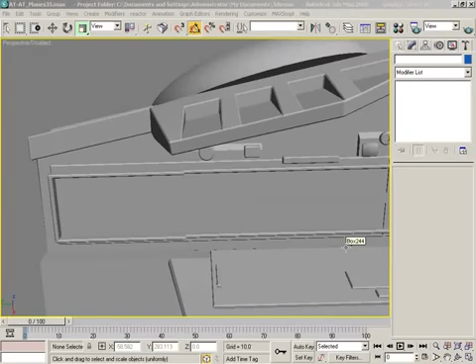In the previous video we were working on this cannon area down here, and there's some things going on that I kind of want to clean up a little bit. We got editable polys everywhere. Let's take all these guys and slide them in like so, because we kind of scaled everything down but never fixed that, so we need to fix that. We got some color issues we need to clean up too, but I'll deal with that later. I'm not too stressed about this.

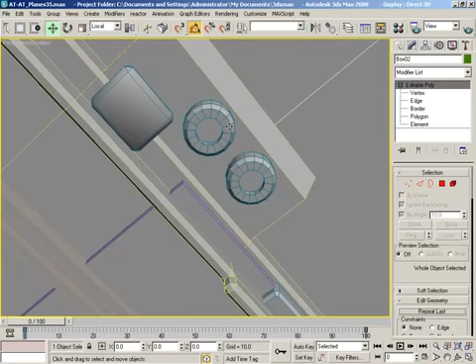Here, this is an interesting little problem. Let's press F4. And I want these guys, aha, those are my friends. Let's get everybody. So let's go to Elements. Oh, cool, I pretty much got them all. That's pretty much right.

Now let's do smoothing groups on these, just because I see some crazy amounts of faceting that I don't really want to see. Oh, you know, that'll do. It's a little more, well, okay, maybe not. Let's try 20 degrees and see what that comes out like. That's probably a lot better. 30 degrees? There, that's what I was actually shooting for, some rounding on that beveled edge. Okay good, so that takes care of that.

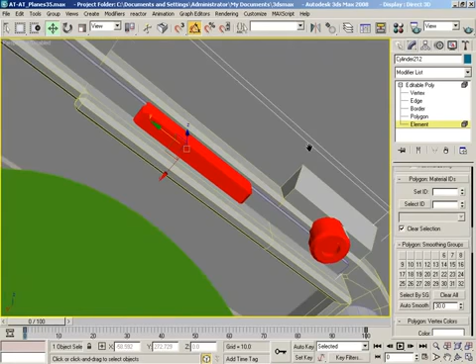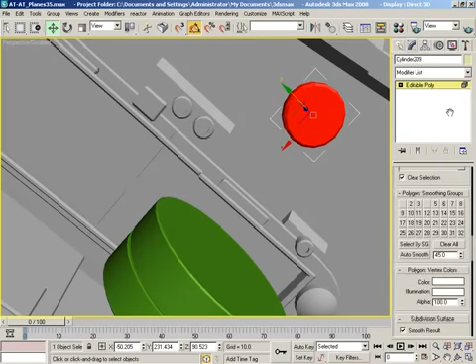F4 to get out of there, and I think that's going to work out just fine. Now let's see, this creature here needs the same treatment, so I'm just cleaning up some things so I don't have to come back and try to remember them again, because there's just so much going on here. I will probably forget.

Alright, good. Now I want to start working on these cannons in earnest, but I don't want to sit here and build them out piece-by-piece with little tiny finalized parts. In fact, I may end up getting into this green thing that I built earlier, I'm not sure yet. But what I think I want to do here is just drop in some simple shapes that will represent the bulk of the cannon itself, and then we will model, make cuts, make edits, make changes.

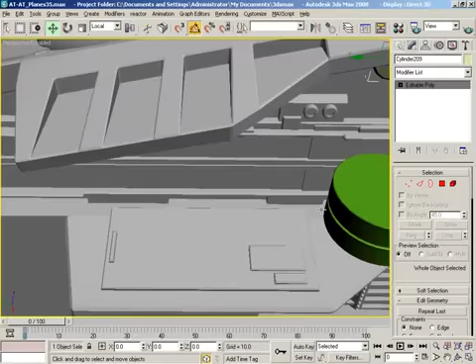Do whatever we need to do to turn those into the finalized hardware, so to speak. So let's just get some basic placeholders for now, just to represent the cannons and what they look like. Let's see here, I'm going to jump over to the back view. And I'm going to assume this view just won't be all that helpful in terms of the image plane, which is probably a pretty safe bet.

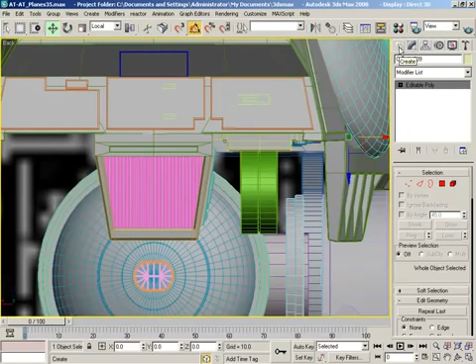But let's create a cylinder, and I'll tack it as close to the middle of that as I can. Give it some height. Go back to perspective. And move this up here where we can work with it. Now that's probably a little bit big for what we're trying to build. Maybe not, it's hard to say because we still need to add to the thickness of these guys. But still, it looks like it's a tiny little bit over the top.

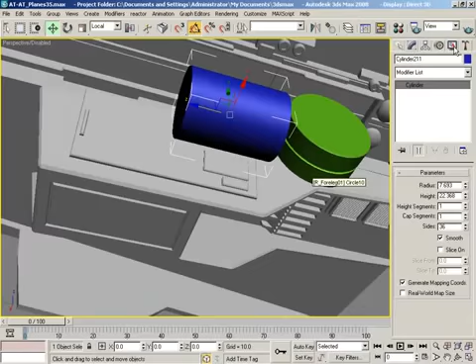So I'm going to pull down the radius of this a little bit. That's probably a lot closer to what we're actually aiming for. And we can slide it forward a little bit. We've got, well, we'll have some work to do on it, obviously. But a couple of things: one, both of these objects really kind of need to go forward. I'm building this really far back on the track.

Let's move these in view space. So maybe to right about here. Maybe even further. Now I'm just going to get this blue cylinder alone. Let's increase its height.

And then it's going to need to taper and go out past the end, but I won't worry about that right now. Let's just shift drag out a copy of it. I'll give this some other color just to differentiate. Let's bring down the radius a bit. Increase the height a little bit. And that's just, of course, going to be the end of the gun stick itself.

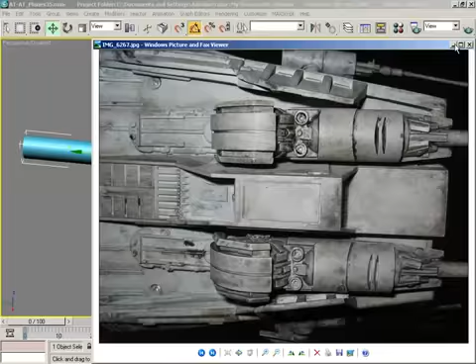Now, something I want to know: if we take our side view here and I switch that over to Direct 3D, which will take a moment to process, can we really see anything in the background image plane? Yeah, we can see a little bit.

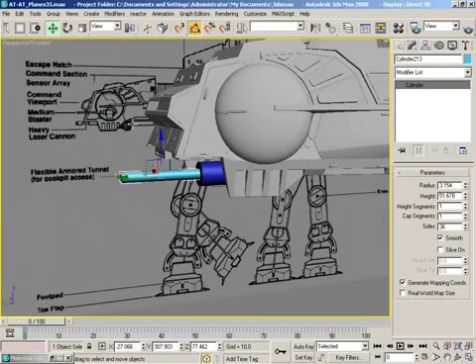Now, in this image, it looks like these guns have really been slid back because they do retract underneath, so I'm not really going to use that as much of an indicator. We'll just go ahead and leave it like this for starters. And because I'd like to be able to use my undos in the future, I'll go ahead and turn that back off.

Okay, so we've got a couple of basic shapes down that we can go ahead and start working on. Now, some of this stuff, we can get an idea of what it looks like. Other parts are kind of vague, really. And what we'll probably end up having to do, not only vague, but they change depending on which one you're looking at. We've noticed that a lot throughout this modeling project.

It really depends on who put together the model, which one you want to decide is right. And then on top of all that, it's really a lot about how much modeling you want to do on it, because a lot of these, as you jump from one model to the other, it's just all about how much tiny little bits of greebling you want to put on there. With things like cannons, it doesn't take a lot of imagination to say, well, maybe the design of the cannon has changed, or whatever. But it's also one of those little tiny details that probably nobody's going to notice. So just do what you want with it.

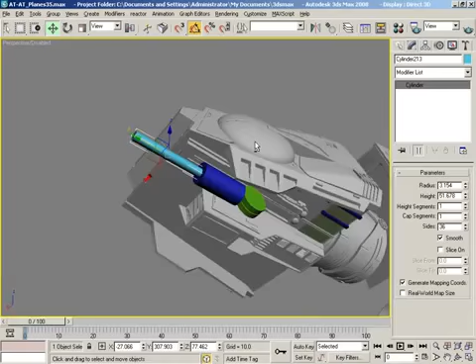Now, we already started to build this piece. And the problem I have with what's going on here is that, in the end, this will not be a completed cylinder. And that does make things a little bit complicated, maybe not too terribly complicated, but here, let's see.

If I come over to my picture, and we can still kind of see what's going on here. What I've built is this piece, and as we can see, this is only a partial shell that kind of wraps around. So I'm going to try something real quick.

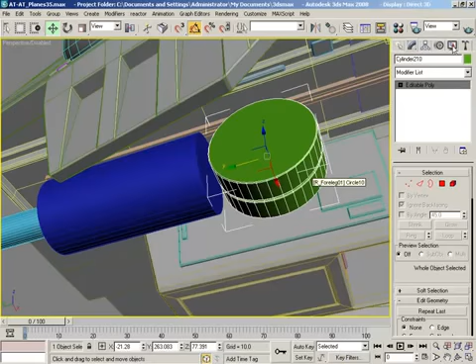Let's minimize this. Let's grab this face. Actually, we have both sides. That's actually exactly what I want. So good. Let's do an inset. By maybe even that much will do just fine. So we'll click OK. And then, I'm thinking, yeah, let's just go ahead and nuke that. So I've got a little bit of thickness.

Now, I'd like to know about how far around this goes, because that's not perfectly vertical. It's kind of getting there. It may be closer to it than I think, but let's see, we got a little bit of wrap around there.

And that's not so helpful. I mean, we could probably just kind of fudge it. We got a little bit of an angle there. So let's say we wanted to go to about here. Maybe only down to there, you think?

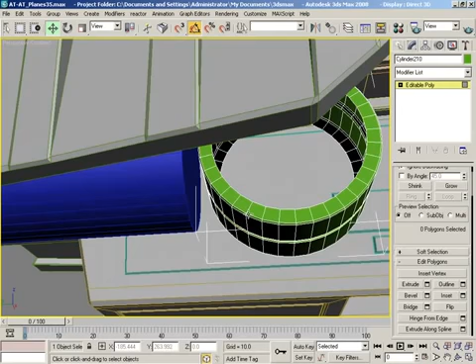Now let's try it. So let's see. Let's grab edges. Yeah, let's see here. Let me try this. Let's grab this edge, and we'll ring that.

Now, do we have any other really nice side pictures of that cannon? I think we don't have much that's really all that detailed. And nothing that goes up very high. So we'll probably end up just having to kind of make it up as we go, which is, of course, just fine. I just want to know before I really start slamming stuff together.

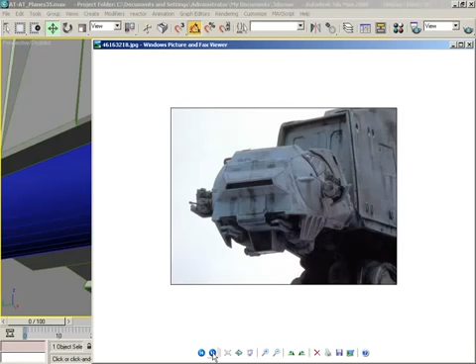Yep, we're switching over into make it up mode. Yeah, it kind of tucks up into some stuff there. So we could actually pull the track piece down a little bit, maybe with some greebling and whatnot. Take these edges and bring them down to kind of surround everything a little bit later.

But we're going to start off there with a ring. Let's go to about maybe here and do another ring. Convert those to faces and delete. And then we can grab elements and make sure I have elements, and let's grab this element and just nuke that. So now that's all kind of by itself.

Now I want to try something. Don't know if it's going to do what I want it to, but sometimes you just have to guess. Let me try the old shell modifier. I actually remember when this came out in Max. Long time ago. Alright, so let's see. Outer amount, inner amount.

And we'll just give that some thickness with shell. I think that's going to work out just fine for us. So let's right click, convert that to an editable poly. And there we are, awesome.

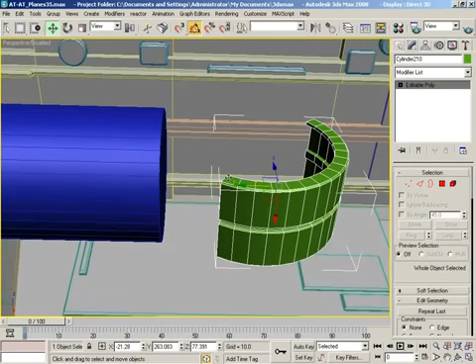Now we've still got that funny little squared off hex bolt-ish area around the outside. I'm not going to stress that at the moment. Let me show you what I'd like to build next.

Because we really do have a cylindrical shape that needs to fit inside, kind of like a disc or a few discs. So we've got this that sits kind of inside here. So I want to build this area, and here's how I'm going to do it.

And there, now his pivot is right there in a nice location. Very nice location, actually. Let's pull all this stuff back toward transparency, and let's jump over to the left view.

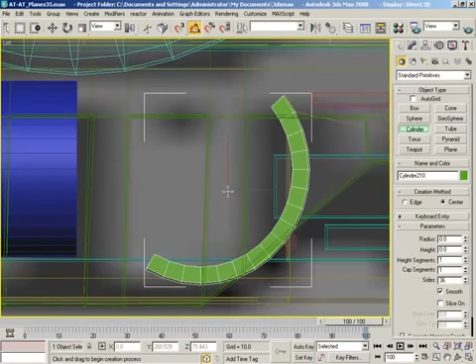And I don't really want to do that, I just want to move. So we'll zoom in here. Now let's grab our create cylinder, and I'm just going to click right about the dead center of that shape, well, where the pivot was anyway. We'll have to kind of modify the position, obviously.

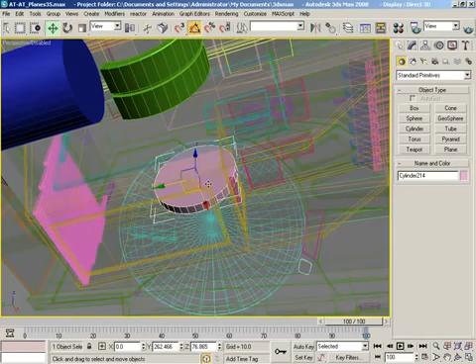I'm just going to kind of fit that inside. Perfection isn't necessarily critical in this case. Now, boom, hit P, let's slide this over. Ooh, that really didn't do what I wanted it to at all. And slide this over. Okay, looking good, now let's see.

I'm getting maybe 3 separate levels of pure detail that I need to be worried about here. So we could just start there. Yeah, let me just try that. If you don't understand what I mean when I say that, you'll know here in just a moment.

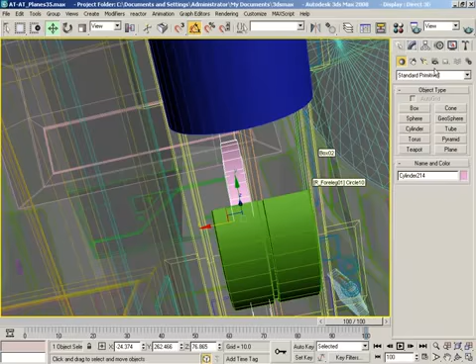Let me pull this over to about here, just something to give me the overall thickness of the part, which is going to fit just about inside here, but maybe not really. Let's just say it does fit. So we'll go from here, and then I'll increase my height all the way to the other side.

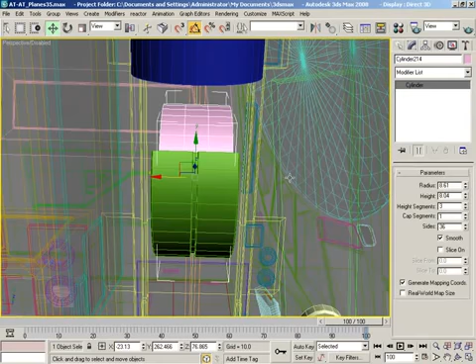And let's frame up on that, and I'm just going to kind of eyeball center that. Looks pretty good. Now I'm going to give this height segments of 3 to start us out. Let's go ahead and convert that over to an editable poly.

Now let's grab edges, I want this edge and this edge. We want to loop those and then chamfer them with nowhere near that much chamfer, so just a little bit like so. Let's grab an edge here and an edge here, and we will ring those.

Boom, and let's do an extrusion. I'm not going to worry about a bevel, this is just so tiny, we're just going for some differentiation. Click OK, so now that's broken up into 3 separate areas.

Now let's grab edges again. I want this guy, we want to ring that, convert that over to faces, and then I want to scale all those apart just in Y and Z.

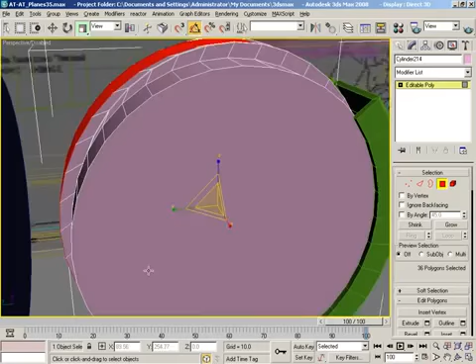So like so, make the whole thing a little, well, I'd like it to be a little thicker. It looks like it's kind of going a little, ooh, you know what? It took me a second to figure out what just happened there. When I did my extrusion, we were going by group, and I just always assume things are going to go by local normal, which I shouldn't ever assume that.

So there we are. Now let's get edges, get you, and then ring, and we could probably just scale these. We don't really need faces that bad. So pull that out. Now we can convert that over if we really wanted to, and we could do a bevel by local normal. So just a little bit out in height and a little bit in right there.

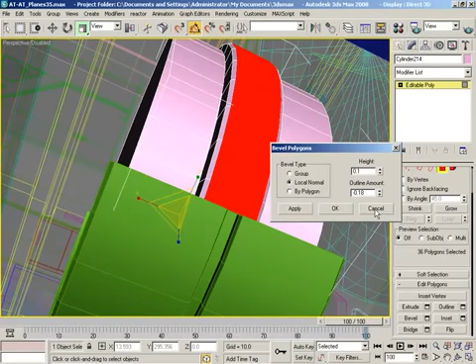Actually, let's not do that yet. I'm going to take that back, so cancel that out. And also scale this back down just a little. I like the different elevation, but that was just a little too severe. So there we go.

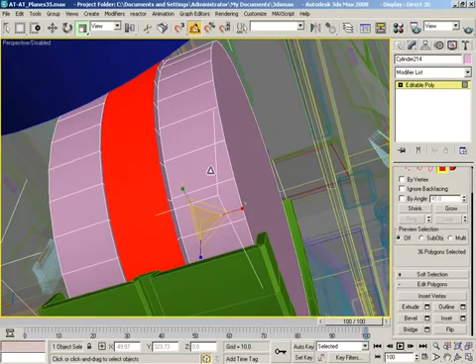Okay, now we've got some plating and some interesting things taking place on either side here. So what I'm going to do is just kind of break this up into some segments that are doing some things. So let's see here, let's grab faces, come here, come back here, you. Wow.

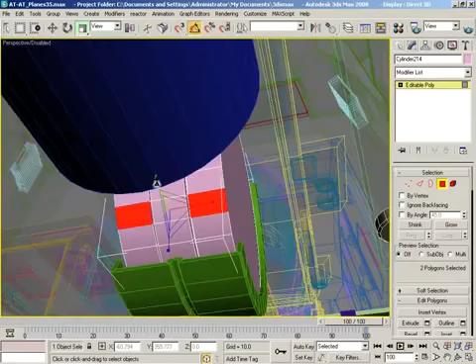Raycasting selection in Max is just the coolest thing, isn't it? All right, so boom, I really don't understand what their algorithm is. I mean, if somebody would like to send me a white paper explaining how when you click on a shape you get some random magical stuff that's hidden behind it, I would read the heck out of that white paper, let me tell you. All right, now, boom, we got all this stuff. So let's do this, let's grab you and you and all this stuff up to about here where it's no longer visible and no longer necessarily pertinent.

And let's extrude. We'll go out with that, click OK, and then we'll immediately do a bevel. That's a nice little bevel. We'll just do that much.

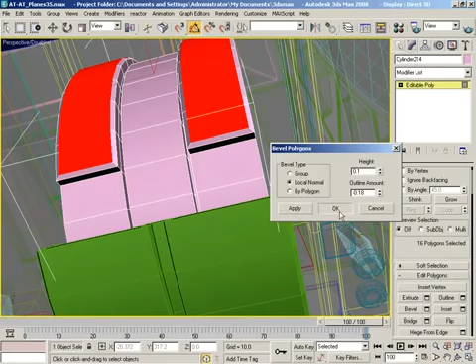Now I'm going to grab all these edges. It already knew which ones I wanted, which is fantastic. Let's do several connections here.

I'm not going to worry about the picture anymore, I'm just totally making this up as I go. Let's just try 2, and that'll be OK. Then let's chamfer that and click OK.

Let's grab edges here. Let's undo until it gives me that back. So I want this edge, and this edge, and this edge. And actually, you know what, not that guy—let's just get the two outer guys for a moment.

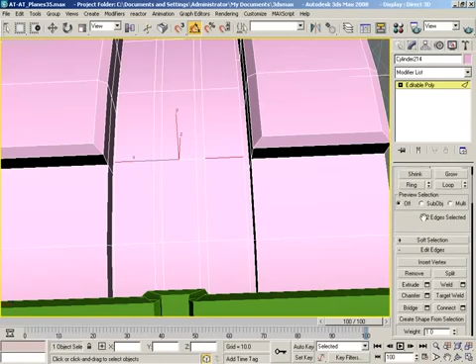And let's ring those, then we'll convert over to faces. We'll do an extrusion and make this an outward extrusion, so that goes out a little bit.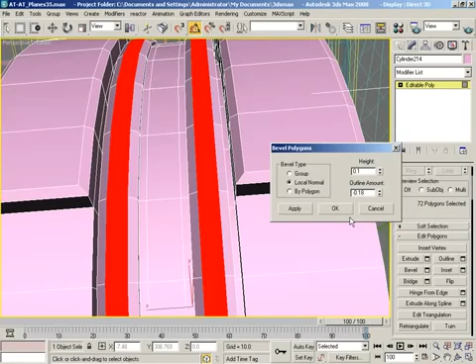Click OK, do a bevel. Now in here, let's go to Edges, get U, do a ring, connect that a few times, click OK. Let's chamfer that just a tiny little bit.

Click OK. Now back to faces, and we want U and U and U and U—not U, but these few in here.

And let's do a bevel, and we'll go a little bit higher. Actually, no, let's not go very high at all. Click OK.

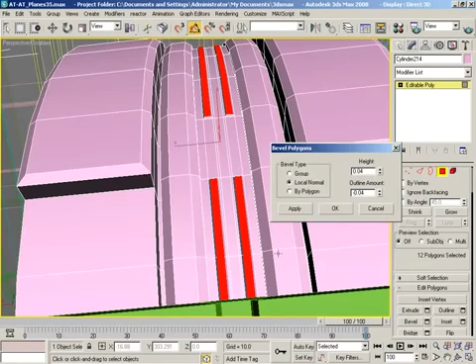And we'll get all these guys in here and we'll do an extrusion. Goes out pretty far, and then do a bevel on top of that, and click OK. So now that has a lot of different things going on with it.

And then we'll grab these guys. Let's do an inset—not that far, just a little bit. And we'll click OK.

Extrude inward, and click OK. So cool, so now that's just got a little bit more of an interesting feel for what's taking place there.

Now I'm going to grab either side over here, and we're going to inset these. Like so.

And you know, yeah, okay. I'm still there, I'm still hip and with it. I know what I'm doing.

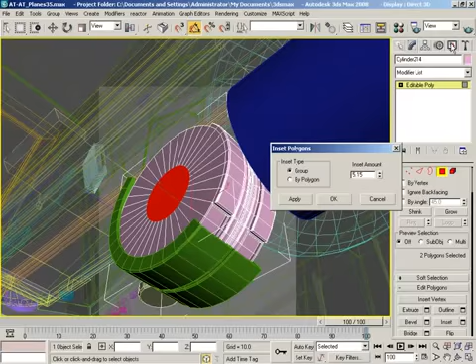Let's pull this in a little more. Click OK, I want to do an extrusion, so go out positively.

Click OK, and then let's do a bevel. We'll go positive and then positive, so it's actually going out a little bit. Click OK. Do an extrusion.

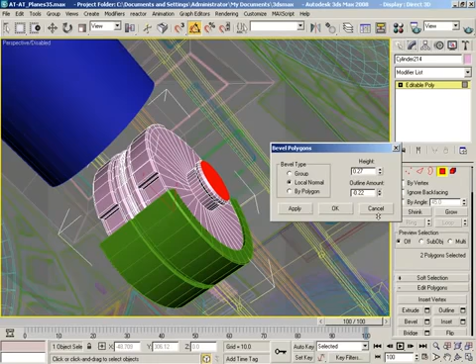Not quite so high. Click OK, and then another bevel, this time going inward, and that's OK too.

Let's see, now if I grab you, I should be able to ring, and let's just do it on both sides just for the fun of it, and ring, and connect.

Actually, let's just connect once, and then let's see if that... this should work. I say that sometimes and I end up biting my words, but this should work. I should be able to just scale these out with edge constraint on. That seems to be fantastic.

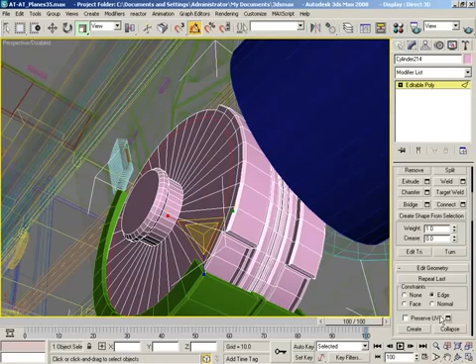So let's go ahead and click OK there and get out of edge constraint. Excellent, so we're going to do a chamfer on those by a little more than that.

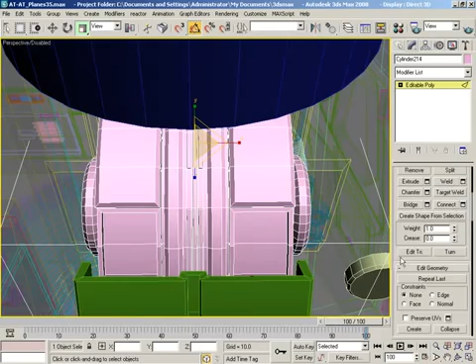All right, and an edge. And an edge—oop, not an edge. And a ring. Convert this over to faces.

Let's do a bevel, and we want this to go in negatively and by just a little bit, and that'll be fine. We don't really need to go any further than that. Okay, awesome, that's working so far.

Okay, now a few things that we need to do to clean this up, and I'm going to jump out of wireframe mode by hitting F4.

Let's get U and U, and let's drop our material on, and then shade everything up so we can see what it looks like.

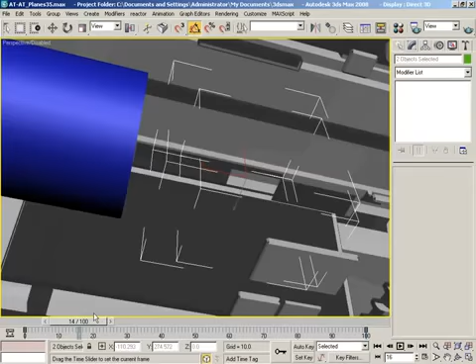Alright, cool. Also, I need to adjust smoothing groups on this piece, because that's just looking bad.

So we'll hit 5, and 45 might do it, but that's probably a little extreme, so let's try 30 degrees. Even that's a little bit too high, so let's try 20.

I think that'll work.

Now, let's see, a few things that I want to do here to make this just look a little bit nicer overall. And the big thing is I want to cheat and make this as easy on myself as I possibly can.

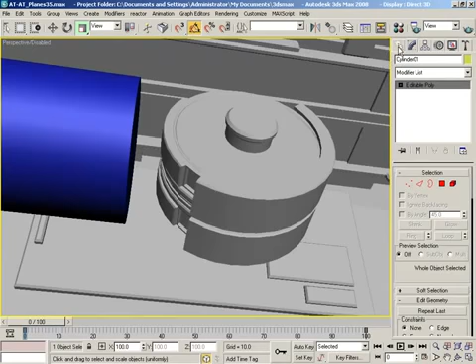Let's see here, let's do a box. Oh, I guess I need auto grid on. So let's make sure that that doesn't go anywhere—we want auto grid. Let's draw a little box right here.

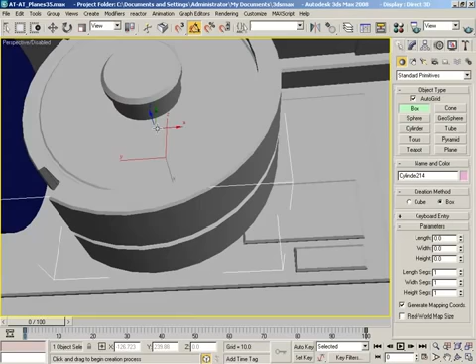All right, now a couple of things. Let's press F4, I want to be able to see the wires. And let's get out of here. We're going to take our length segments, and we'll pull those up.

That's probably enough to kind of get us started. Get my move tool out. And let's see, let me grab my align. And let's cancel that actually. We want you by yourself. Come on.

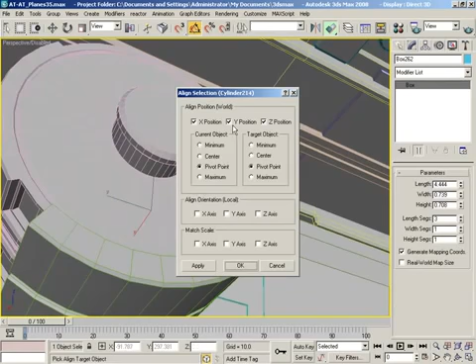There we are, and align to you. Pivot to pivot, but not in all 3 dimensions. Let's just do this in Y only. So that looks nice, click OK. Let's increase our length so that sticks right into the central hub.

And now, let's see here. We could probably get away with just 1 height segment, I'm thinking. Or length segment, so let's just do 1 here. Or 1 extra, so it'd be 1 plus 1. Now let's convert this over.

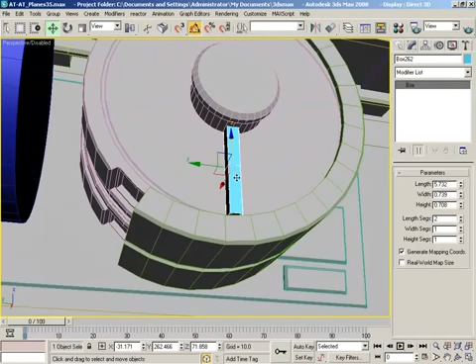Let me grab edges, I want this guy. We're going to loop and we'll pull that down. Hit 4 to grab faces. Did I hit 5 instead? Because really all I wanted was this guy. Now I'm going to hit Z to frame up on that.

Just pull this out to about here. Grab edges again, we'll tuck this guy down a little. Now, if I grab this guy and loop, well, we get kind of up to where I want to go. So let me just start here with a ring.

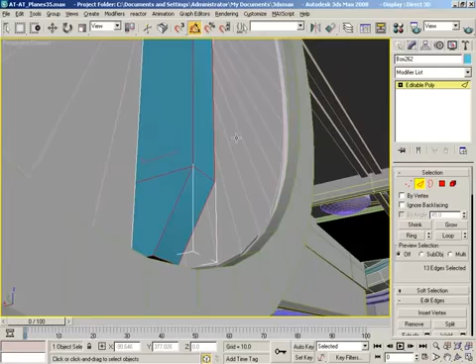I don't want this guy. So let's hit Q so I don't accidentally bump something. And I need this, and this, and this. We'll go ahead and grab that, and this, and this. We can go ahead and grab these two. You know, let's just loop that. That's probably good. Okay, now let's chamfer all this.

Now also, I'm thinking that this could be widened up from what I originally designed here, so let's thicken that up a little bit.

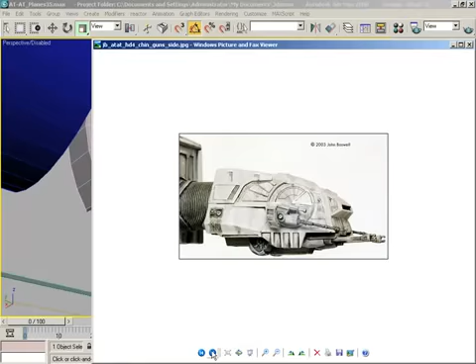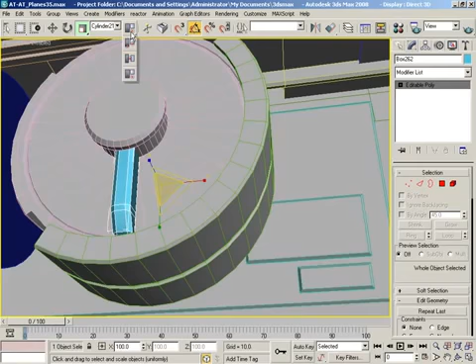So let's see here. Well, what we can probably do... yeah, that should probably work. Let's try this. Let's go ahead and get out of here, and then let's switch our mode to pick, and we'll go in cylinder 214 space, and then use transform coordinate center. Did that? It looks like that did what I wanted it to. It's just the control is so far away you couldn't really tell.

So cylinder, reference coordinate system. Now we should be rotating around, and it looks like we are, which is good. Now I'm going to shift drag this out to 45 degrees and make 1, 2, 3, 4, 5, 6, 7 copies. And now they go all the way around. Excellent.

Now let's get all of these. And you know what? Let's do this. Let me just grab one of them. Just one, please. Anyone? I'm telling you, ray casting, it's a beautiful thing.

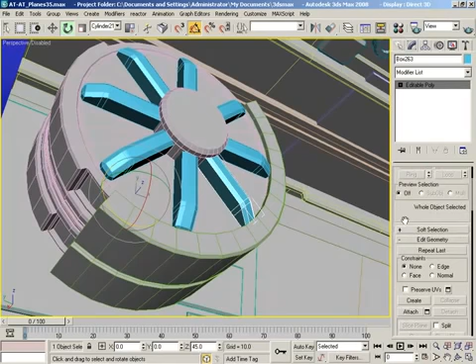Excellent. All right, and let's see, we want to attach. Cool. And let me drop on a symmetry modifier. Bump.

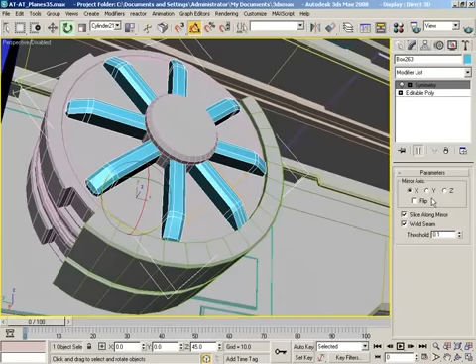Now it's probably already going in the axis I want it to. No, it's not, not at all. So let's go Y, no. Z, yes. But we need to move that mirror. So let's slide the mirror this way until these guys just sit right on the outer surface. Yeah, I think that'll work great.

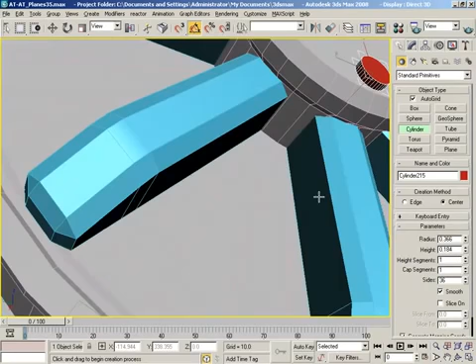Now the only other thing I want to do is grab, let's see here. If I come over and I grab a cylinder, we create a little cylinder right here. Give that a little bit of height. It doesn't need all these height segments, that's way too many height segments. It probably doesn't need to have 36 total sides either.

We can pull that way down, say to 16. We could probably go a lot lower than that too, for what I'm doing. There we go. Now let's convert this and grab you, and then let's do a bevel, and that's a crazy bevel. Crazy bevel, we don't need crazy bevels. All right, looks good. Now let's pull back.

And let's see here, the next thing, we want to set its reference coordinate system for rotate to cylinder 215, which it already is, and that's fantastic.

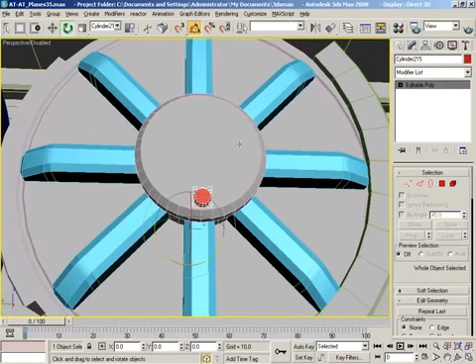Now, if we do the same thing, we rotate this around to 45 degrees, create 7 copies. Now let's use attach, and we'll put all these together into one great big piece like so.

Then, if I was to take this and rotate it half that, I can't hit it right in the half, can we? Well, we probably don't need to anyway. I noticed when looking at some pictures, especially this nice one underneath, you've got these little tiny bolts here. There's probably more than just 8 of those, but I think 8's going to do it.

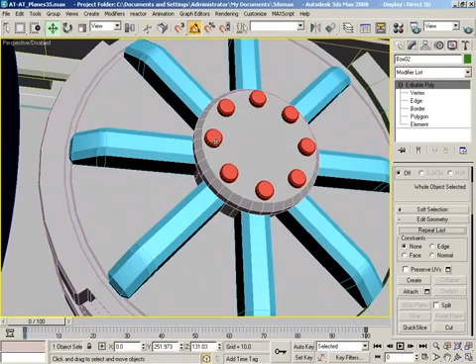And then, just because we can, let's do a couple things. First off, grab you. Once again, let's drop on the symmetry modifier. In Z. Grab the mirror. Slide back over. Just sink those in, just in case somebody happened to see that. They will be there.

And the only other thing I wanted to do, and this was more of a personal preference than for any rational reason, is at least grab this face, even if we don't do it on the other side, just this face. And let's do an inset, to about here. And then a bevel, a fine bevel with me. We'll just leave it like that.

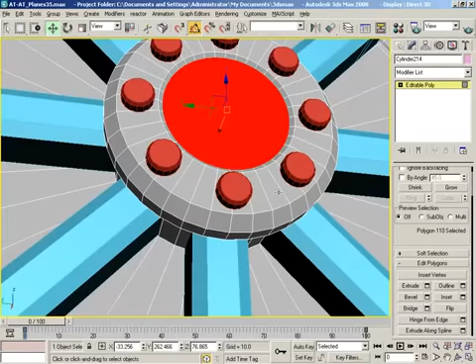So there we go. So now the next thing we need to do is create the kind of funny looking shell shape. And I say funny looking, well, because it is. So it's this piece right here.

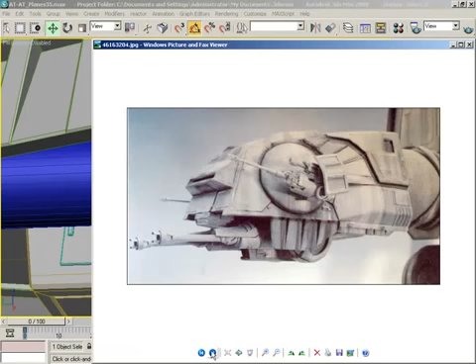And if we flip around, there's at least one fairly good shot of it. That is not a good shot, it's way too much in shadow. This is a pretty good shot. Because what we've got here is something that's mostly rounded on the inside. It has this funny little extension here, which flares, actually. And then it's all squared out, almost like a hexagon, but not really, on the outside.

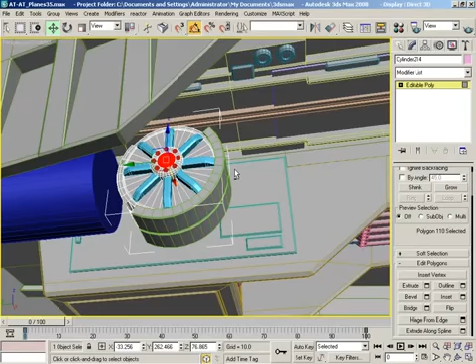So, for people who know the AT-AT Walker, I think they might be looking for that, just because it is such a weird design, but I don't think it really necessarily needs to be super hardcore, perfect, precise to get the job done. So let's see here. To make this, what am I going to do? What am I going to do?

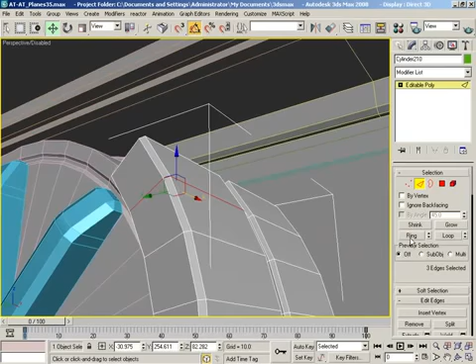Well, I think what I'm going to do is grab some faces off this guy. Actually, hang on, let's start off with edges, and I'll make them faces. I want you, you, and you. And I want to turn that into a ring and convert that over to faces. Excellent.

Okay, looking good. Let's just shift drag that over, and we'll make this into its own object. Let's get out of the editable poly mode here. Kind of do the same thing again, except what I want to do is just get these two, ring and convert, and then we'll thin this out because it doesn't need to be quite so big. All right.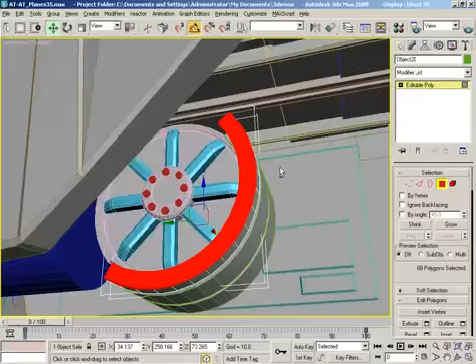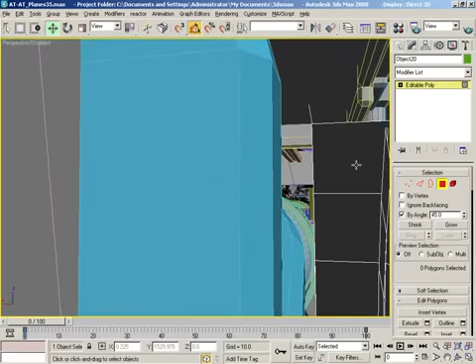Now, I'm going to try something. I don't know how well it's going to work, but I'm going to try it anyway. Oh wow, yeah, that grabbed a little more than I wanted it to. So let's do this. Let's grab faces by angle, 45, delete, delete, and delete, and delete, and delete. So totally clean this shape out.

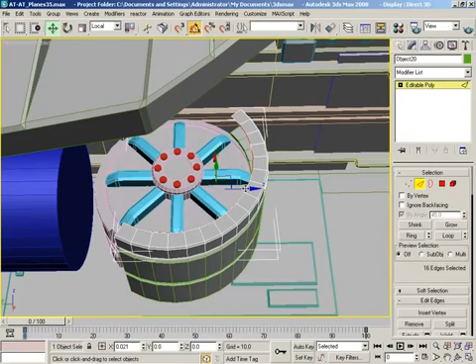All I want is the razor thin thing that we're working on here, and nothing else. All right, now I have no idea if this is what I'm about to do is actually going to work the way I think it should. Just because I think something should do a thing generally means it's going to do something else entirely, unfortunately. But, let's see. If I move these guys locally, what do we get? Well, we get some really interesting flying off in random directions there.

Well, here's something I might be able to do. Let's switch these over to Cylinder2 space. Use the reference coordinate center, and then see if I can just scale these guys like so. And that seems to be working. That's really just about all I wanted to do.

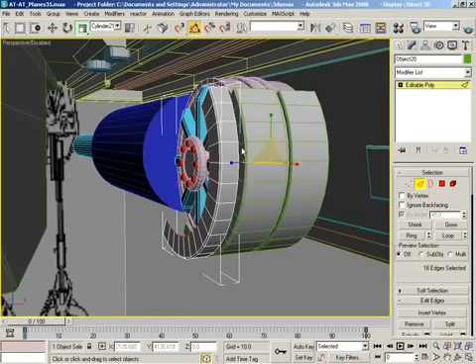Okay. Now, we need some flattened areas here. Now, this, to me, this seems like the kind of thing that's going to require a lot of back and forth. And the way I want to handle it... well, let's do this first. Yeah, that's a bit of a problem. Let me grab...

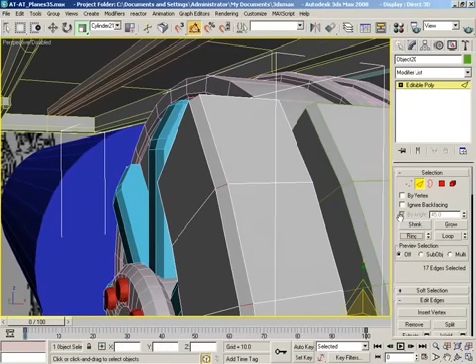Hang on, I don't know if this is going to do exactly the way I think it's going to. Let me convert these over. Cool, and there's those vertices. Now let's do a weld, and boom, weld all those together. Click OK. Good, that got everyone.

Let's grab faces, and by angle should be fine, so I can just get all these, and I want to flatten them in Z. So I just kind of got rid of that bevel, is really all I accomplished there.

Alright, now let's switch back over to faces, or these faces in particular. So, boom, and I want to turn this off. Let's grab every, I don't know, 3 faces? 4 faces?

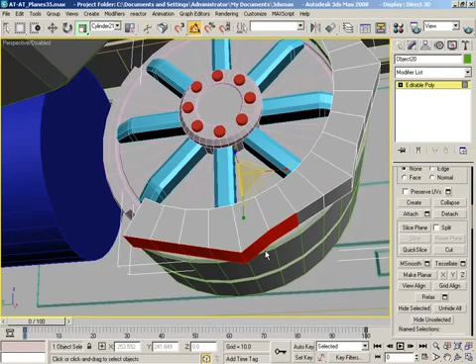And we're going to have to do this probably a lot if this works out the way I think it will. Let's make these planar. Grab these 4, and we'll make these planar. Grab these 4, and we'll make them planar. And grab these guys, we'll make them planar. Now we got to just kind of keep jamming with this because they're steadily going to get closer to being truly planar with one another.

So I'm afraid to see what would happen if I tried to click the edge constraint button, but I'll try it once, you know. So those kind of stretch out. That looks a little funny, but it got the shape that I was looking for. Ooh, that really didn't. So let's just not worry about the edge constraints.

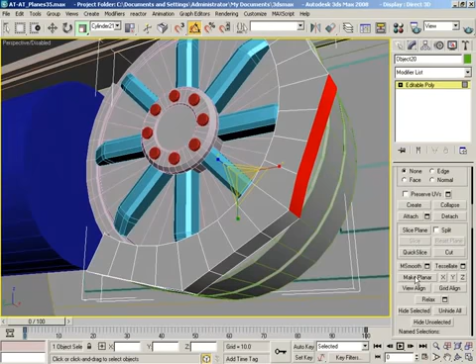But as you do this a few times, what you're going to discover is that these steadily become closer and closer to being planar with one another. Now, if you wanted to get downright technical, it's probable that they're never going to make it 100% perfect planar if you could, you know, put a laser on them, that sort of thing. But I think they're going to get so close that nobody's going to be able to tell. And that's all I'm going for.

So we've got nice cylindrical shape on the inside, we've got the squarish shape on the outside. We can take the whole thing and we can scale it down a little bit. Ooh, I want the element, please. Scale the whole thing down a little bit so it kind of fits on the inside.

I mean, that looks to me kind of like what it's doing. If we look over here, it kind of fits just inside. So that inner ring is a little bit larger.

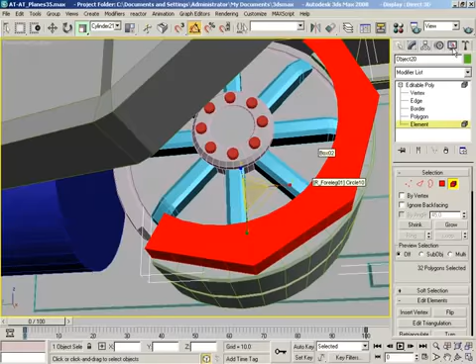Also, it looks like we could take this edge and this edge, get our move tool out, and these could just be pulled out a little bit. Grab vertices, vertices please, and this can be flared a little because we need to do that anyway. And we can use this to help it.

Now back to edges, I want this guy and I want to loop it, and let's do a really nice chamfer here to create some rounding. In fact, I'd like to put a couple of segments in here.

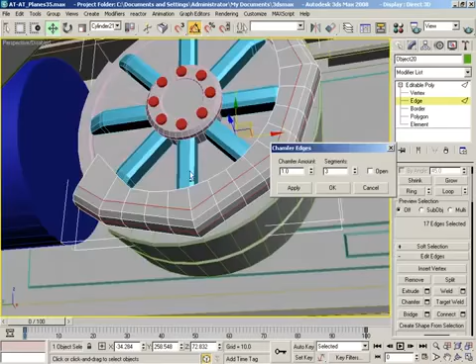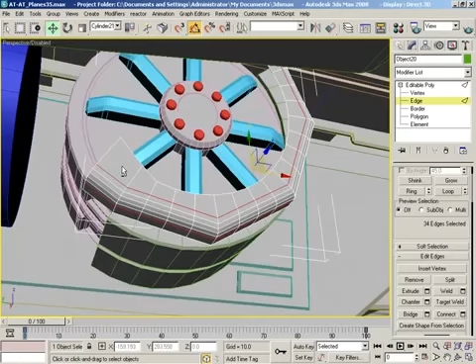Okay, and let me go back to vertices. That seems to be working. Let's get out of sub-object mode. Pull that in. I'm going to go to my elements, and we're going to scale this whole thing in just a little bit more.

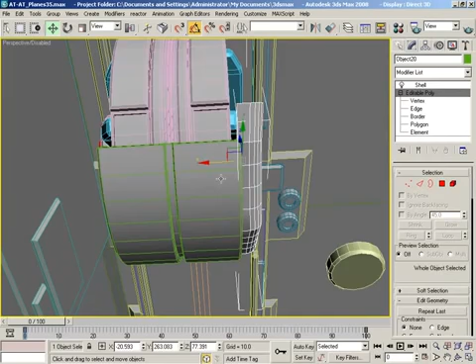Let's get out of editable poly mode, and we'll drop a shell on it. And it has the same settings as the last one, which is okay by me, but we need to get vertices, and we need to pull all these in because they got a little bit knocked out of whack. And then we'll slide all this out a little.

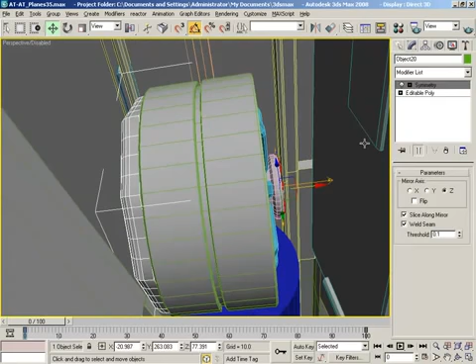Now I'm going to convert this all back over to a regular editable poly. Let's put a symmetry modifier on it. Let's go in Z, and let's see, make sure we grab that mirror and fit that over to the other side, and there we go.

So now if we pull back, get out of sub-object mode altogether, make a nice big selection. I'm not going to worry about these two basic shapes here for our cannon, but let's go ahead and drop on our material. Press F4, and I think we've got something that's starting to really work there.

So there's the basic part to kind of like our cannon, where it's going to be mounting to the underside of the ship, or the head area for our AT-AT walker.